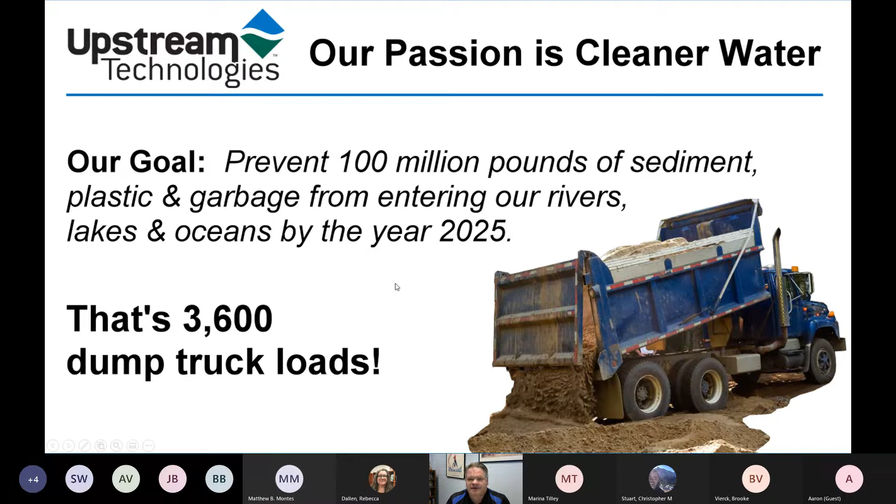We put together a goal at the beginning of 2020, right before COVID hit. We said we want to save or prevent 100 million pounds of sediment, plastic, and garbage from going into rivers, lakes, and oceans by 2025. So we set a pretty big goal. Right now we're closing in on 20 million pounds, and we have a ways to go with just 3 years to do it. So we're focused on that, and when we get up in the morning, that's what we're all about.

We're starting to see different test points around Oklahoma, but we're new to Oklahoma. So the other reason I wanted to present to you guys today is to find out your thoughts, and if there are any groups we should be talking to, any associations or hoops we need to jump through. I would love to get feedback on that.

If there are any BMP lists we need to be on or anything like that—one of the things we found is our company started in 2012. We were primarily Minnesota, and as we've expanded into different states, we noticed every state is a little different, with different groups and different rules and regulations. Any help with that would be greatly appreciated, and if there's a specific group we need approval from, we'd love that assistance as well.

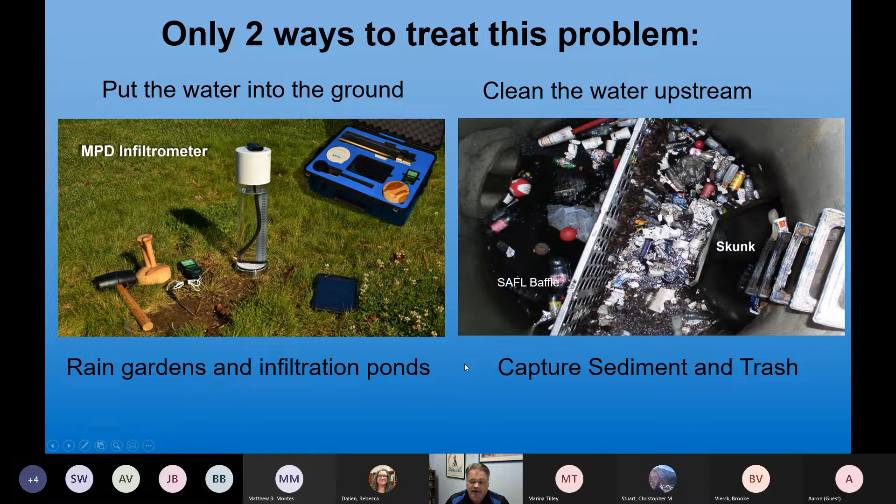I'll start out with the MPD Infiltrometer. If we're looking at infiltrating back into the ground and creating a rain garden or retention pond, we need to know how to size these appropriately. We need to know how well they infiltrate once the ground is saturated.

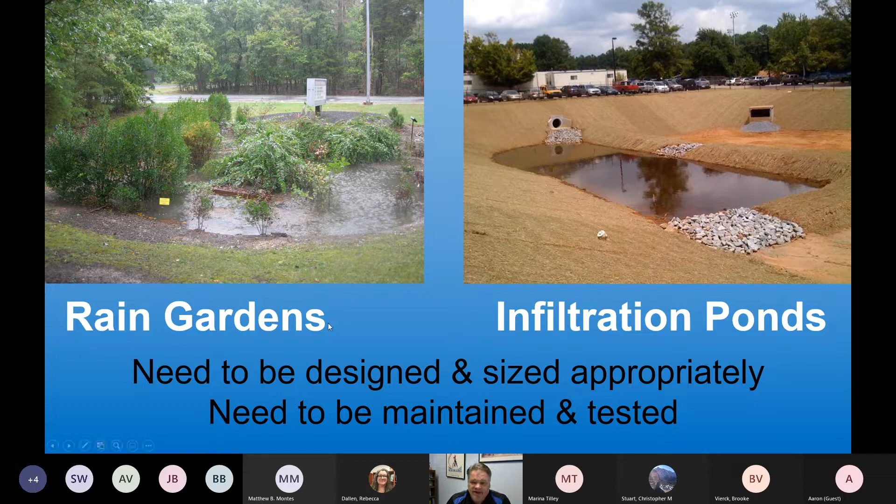There are products out there that just measure the infiltration rate. There's a product called the Turf Tech—they use this in golf courses a lot. This is just to find out what is the soil at this point in time. Is it dry? Is it wet? Do we need to irrigate or not? But that's not a fully saturated infiltration rate or KSAT.

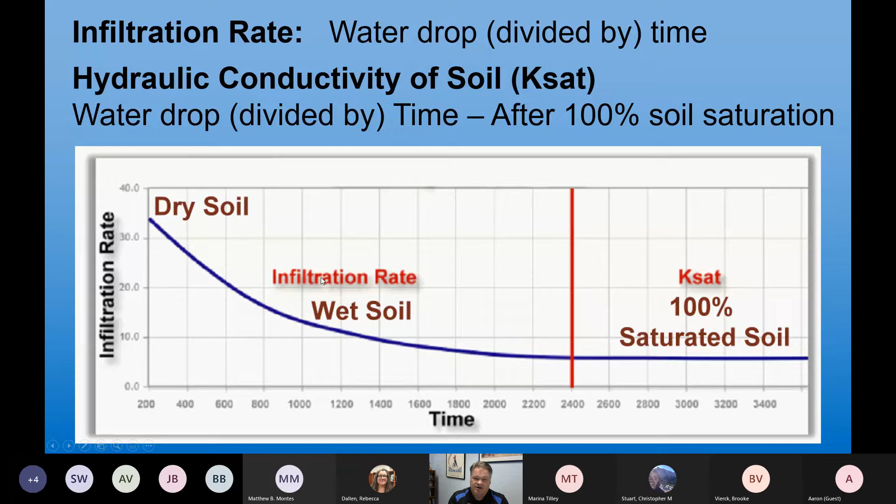We need to get, as in the chart, down to a point where it's fully saturated.

Really, the way this has been done is like a perc test, where you drill a hole and keep filling it with water until it's fully saturated, then measure the drop of that infiltration. Probably the most common that we see is the double ring infiltrometer test.

Normally I would just ask, is this something that you guys utilize? Do you guys hire these out? Is there geotech companies that do this? But this is the one that we're seeing the most.

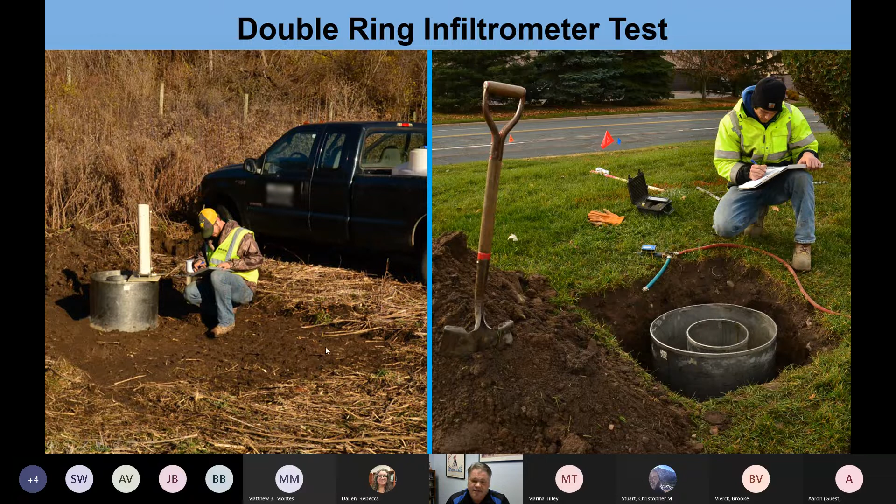The way that it works is it infiltrates the soil on the outer ring and saturates it. It usually takes a lot of water, these tests usually take hundreds of gallons. They saturate the outside ring, then keep that center ring at a constant head, and they keep pumping water into that.

This is a very time-consuming test. It usually takes 4 to 8 hours to do, and it's only giving you one point on that whole site. So it's very time-consuming, very costly, and very cumbersome.

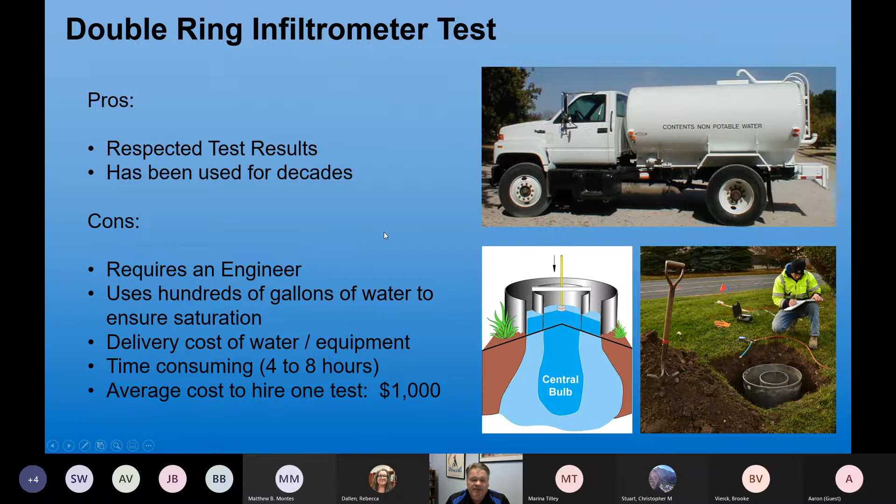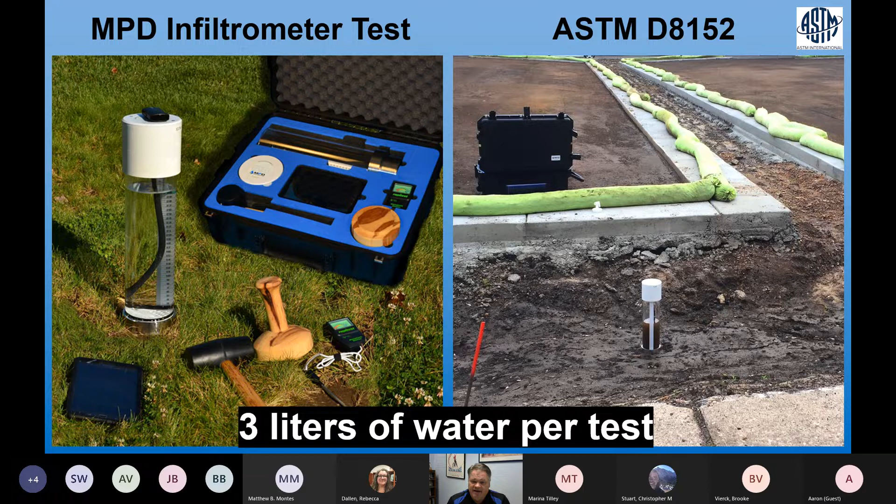What the MPD is, is a smaller portable kit that only takes 3 liters of water per test, so less than a gallon per test. You can go out with a 5-gallon jug and perform these tests throughout the site.

It started back in 1993 with two guys named Philip and Dunn, and they developed a method to calculate KSAT, or hydraulic conductivity of soil, whether the ground was fully saturated or not. They created a way to predict what the KSAT would be, whether the ground was dry or wet, and they did it with a falling head test.

That went all the way back to 1911 using the Green-Ampt theory, and it was updated in 2007 right here in Minnesota. The University of Minnesota modified that method to bring it up to the ground surface. So in 2007, they created the modified Philip-Dunn method, and it went through a series of testing, committees, and subcommittees. In 2018, this was established as an ASTM standard for calculating KSAT.

We automated that system that same year. So now we have the MPD Infiltrometer, which again, you can go out with just a 5-gallon jug and perform 5 tests on that site. Each test, rather than 4 to 8 hours, is usually 30 to 60 minutes. So you can get a much better view of the site, a lot easier, and with a lot less water.

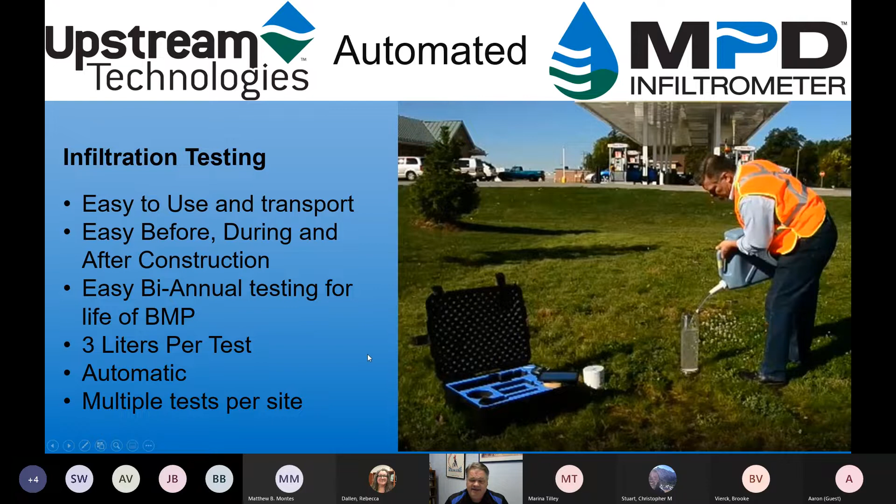And so that's the MPD. I'm going to show a short video here, and let's see if we can get this going.

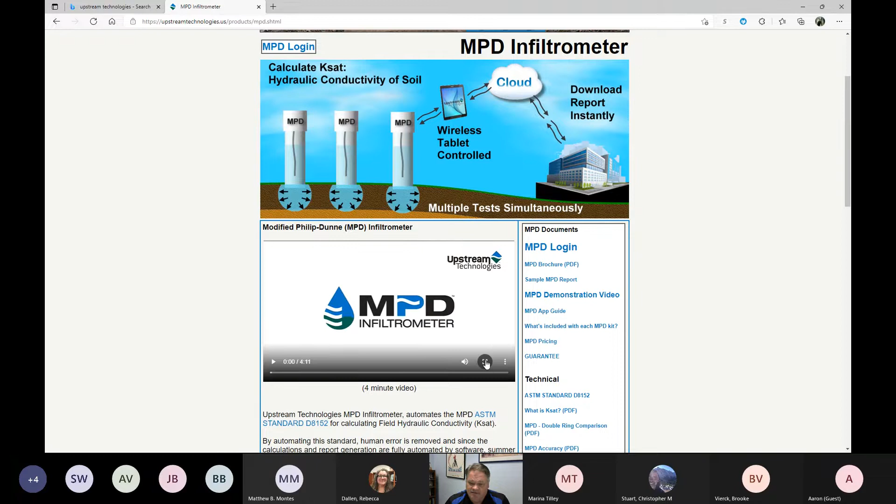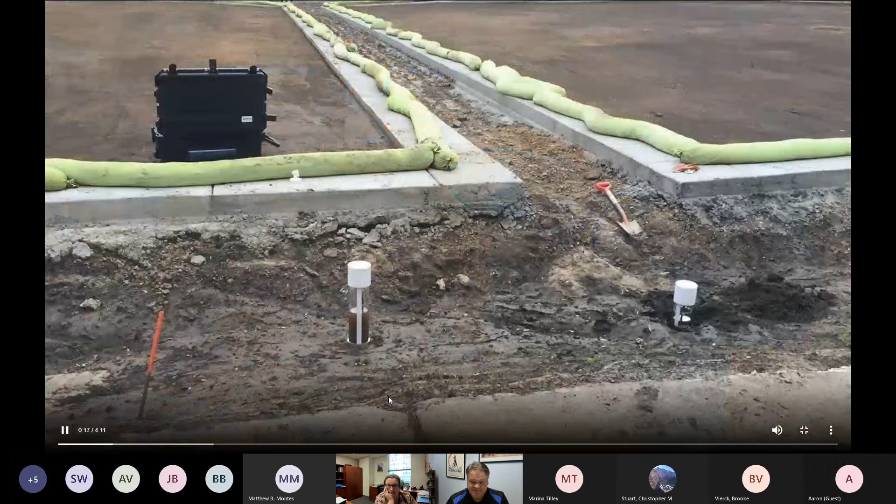Upstream Technologies' automated MPD Infiltrometer follows ASTM standard D8152 and will calculate saturated hydraulic conductivity of soil, or KSAT. It is used to design, build, and test rain gardens, infiltration ponds, bioswales, septic systems, and any location where steady-state infiltration testing is required. Lightweight and compact, the MPD can go anywhere and uses less than 1 gallon of water per test. This kit utilizes a graduated cylinder and an automated test head to collect the data.

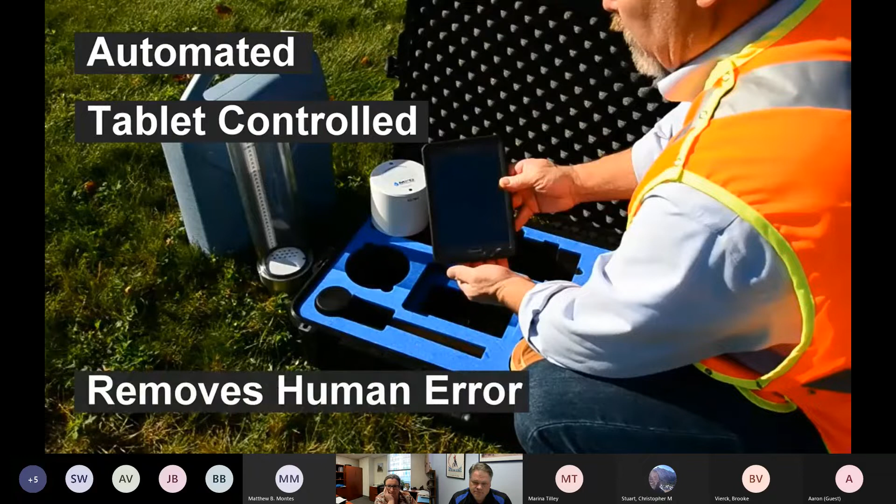The anti-scour baffle and seal prevents the soil surface from being disrupted when filling the cylinder with water. This automated, tablet-controlled system removes any chance for human error. Anyone can operate this instrument with little to no training. Simply consult the in-app guide for step-by-step instructions. This system incorporates a Garmin GPS system to automatically report the exact location the test was conducted.

When performing a test, the first step is to take an initial moisture reading using the supplied meter. Slowly press the probe into the ground 5 centimeters and wait 15 to 20 seconds for the gauge to settle. This gauge is in 10% increments. The result today is 30% moisture.

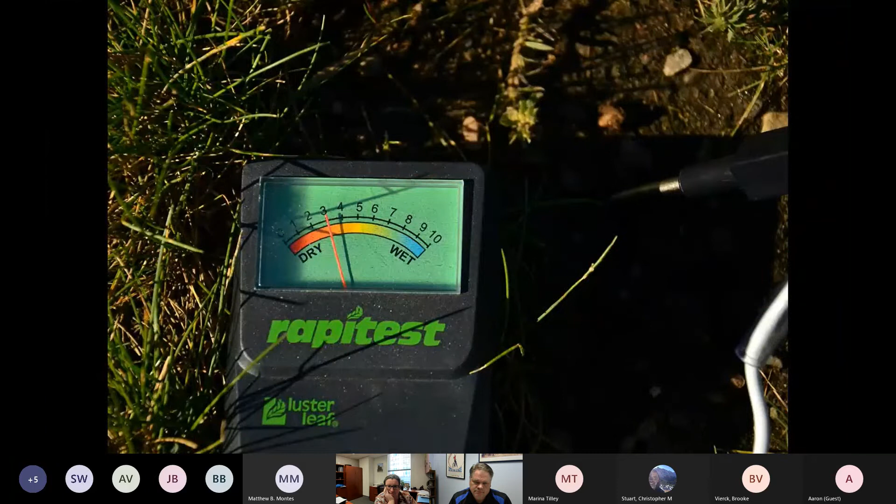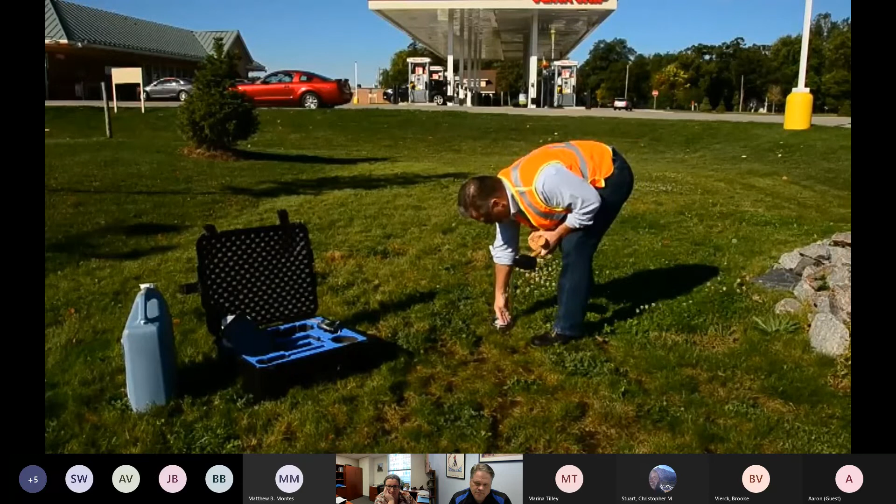Using the wooden set and mallet, tap the cylinder into the ground 5 centimeters. Make sure it is not loose and creates a tight seal with the soil. The anti-scour rubber seal may move during this process. Reach down and reset this seal.

Press and hold the button on the top of the MPD head to turn it on, and a green bar will appear in the app. Tap this green bar, and a dialog box will appear. Enter the initial moisture reading, in this case 30%, and enter a name to identify this test.

Set the tablet down and fill the cylinder with water. Place the MPD head and hose in and on the cylinder. Pick up the tablet and tap the Submit and Begin Test button. The MPD app will now turn the green bar to orange to indicate the test is running.

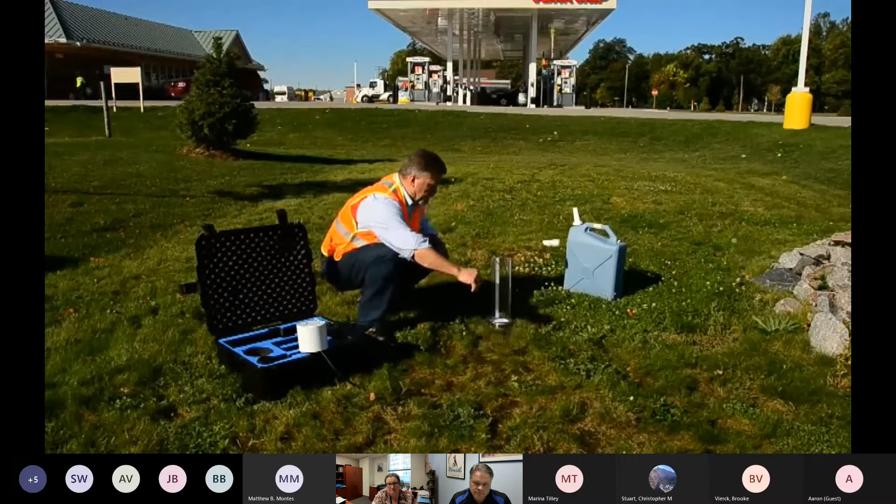The MPD head measures the water head drop over time and automatically records the data required to calculate hydraulic conductivity. It's best to let the cylinder drain completely before finalizing a test. This usually takes about 45 minutes to an hour, depending on soil conditions. When the cylinder has drained, remove the MPD head and cylinder and set them aside.

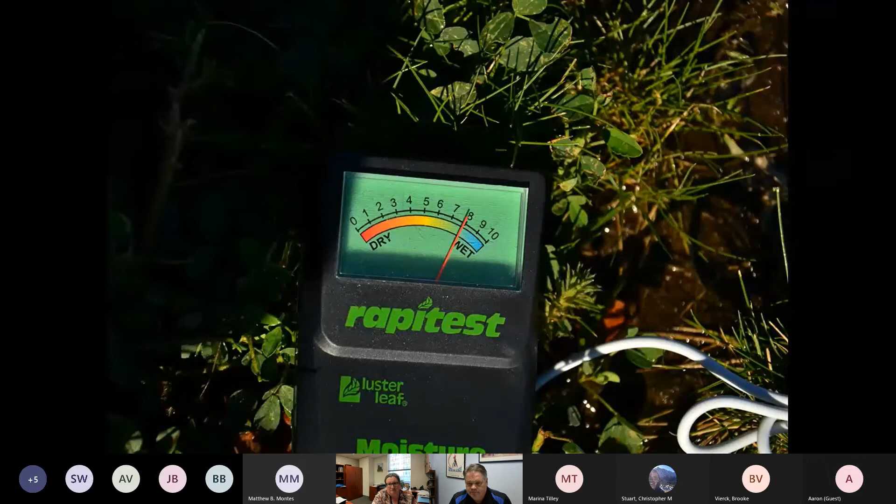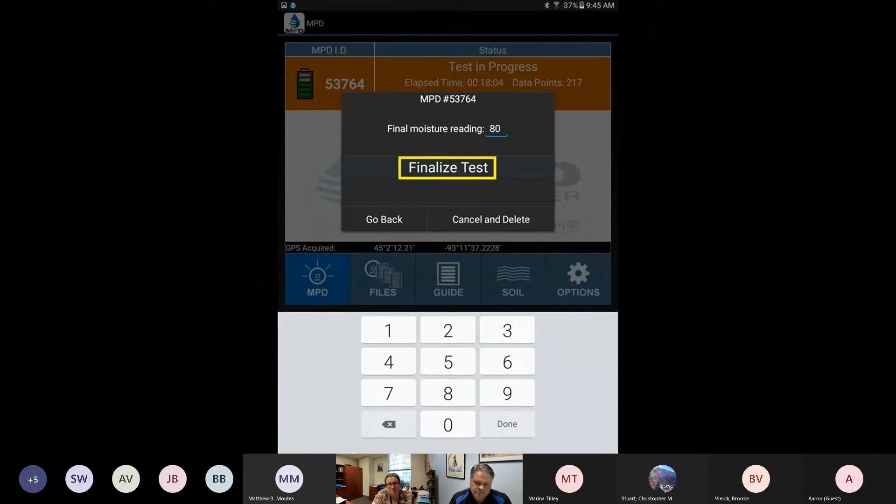Take a final moisture reading in the same location as before. In this case, the moisture reading is 80%. To complete the test, tap the orange bar in the app and enter the final moisture value, then tap Finalize Test. All data then transfers from the MPD head and is stored on the tablet. We're now ready to begin another test.

Ground variations change and infiltration will vary around the site, so best practice is performing multiple tests and creating a site average. Ground variations include soil composition and compaction, boulders under the test, tree roots, and even mole and ant tunnels will have an effect. When testing is completed, the tests are uploaded to Upstream's cloud server, where the calculations take place.

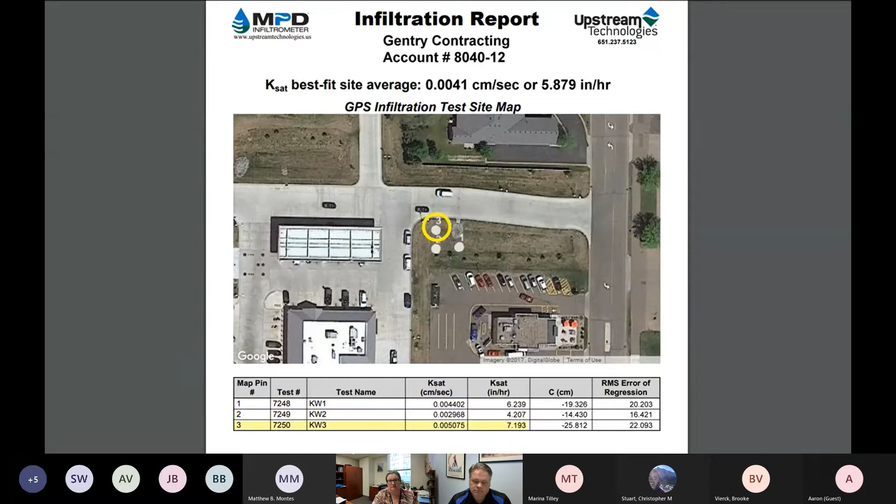A site report may then be instantly downloaded. This report contains a description of the site, a best fit site average, a satellite photo of the site with a GPS map pin for each test performed, and the hydraulic conductivity for each individual test. To maximize time in the field, Upstream Technologies offers a triple MPD kit, so 3 tests may be run simultaneously by one person.

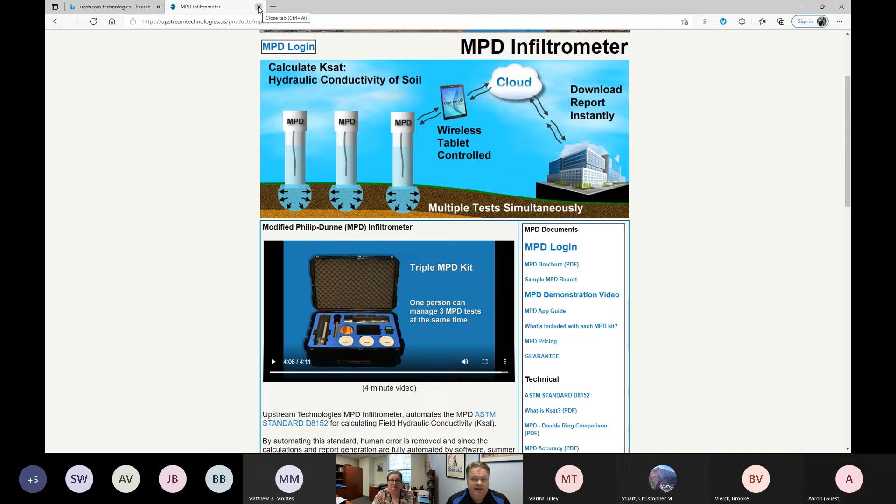So that is the MPD Infiltrometer and the video that's available on our website. I'll get back to the presentation here.

As you can see, it's very easy to use, and again, doesn't take a lot of time, doesn't take a lot of training, doesn't take a lot of water. So quite a bit different scenario than the double ring.

I talked about the years of testing and committees and subcommittees, some of the testing that was performed. This is a tank that we tested internally to show that it can calculate KSAT whether the soil is wet or dry. We started this out completely dry soil, kept doing the test until there was standing water to show that it calculated KSAT either way.

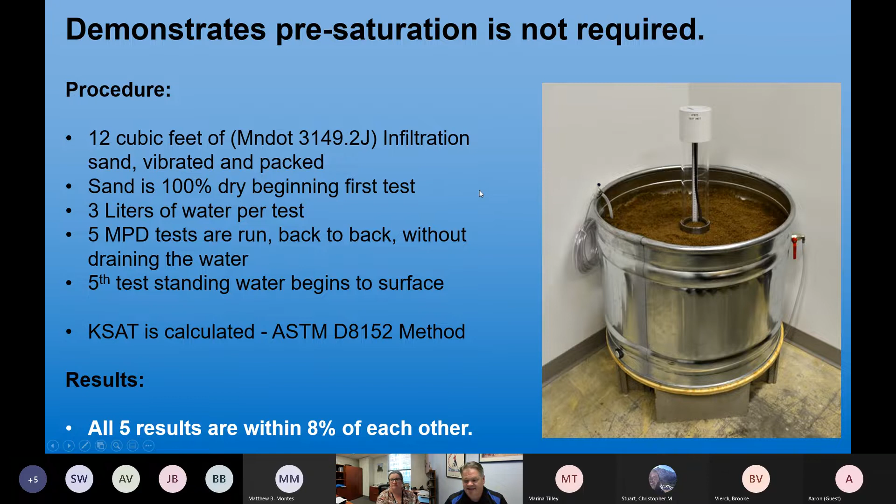We also tested it in a product called the Thermotron. So it's been tested from 33 degrees to 120 degrees Fahrenheit, and also sea level all the way up to 15,000 feet. So it's good throughout the country.

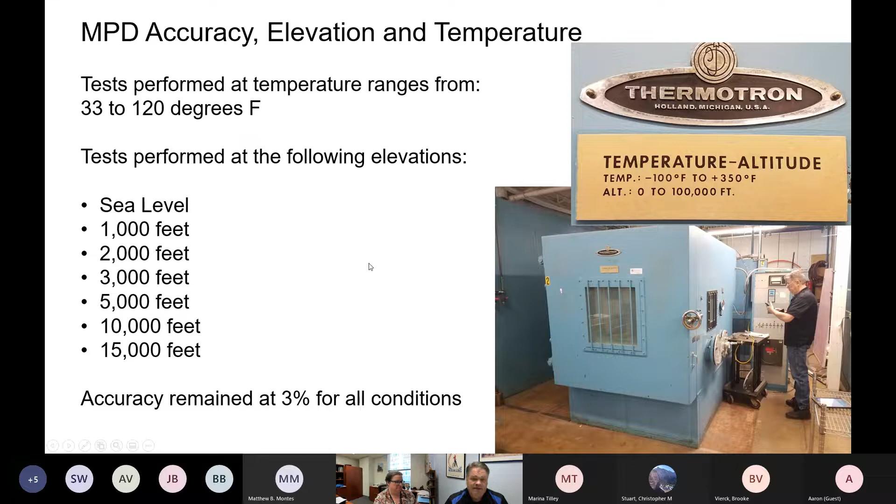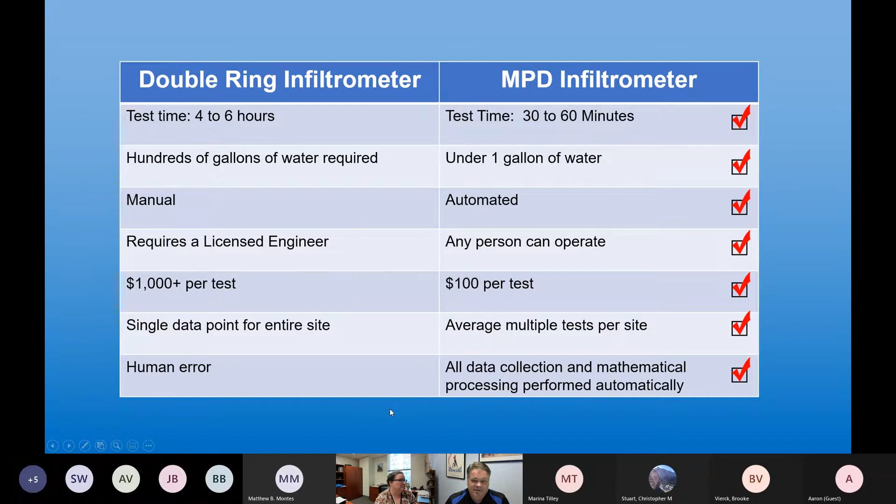And like I mentioned, in 2018, it became an ASTM standard for calculating KSAT. So now it's a lot easier to get this number. What that allows cities to do is be able to manage and maintain these rain gardens much easier.

As it said in the video, you can do up to 3 tests at the same time. Actually, possibly more because there's more room. But our biggest kit is the three test kit, or 3 tubes. It uploads that information to the tablet.

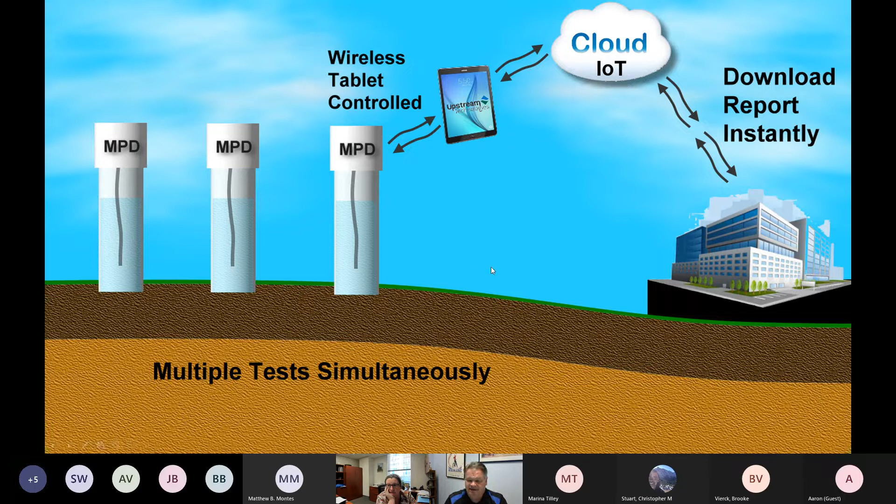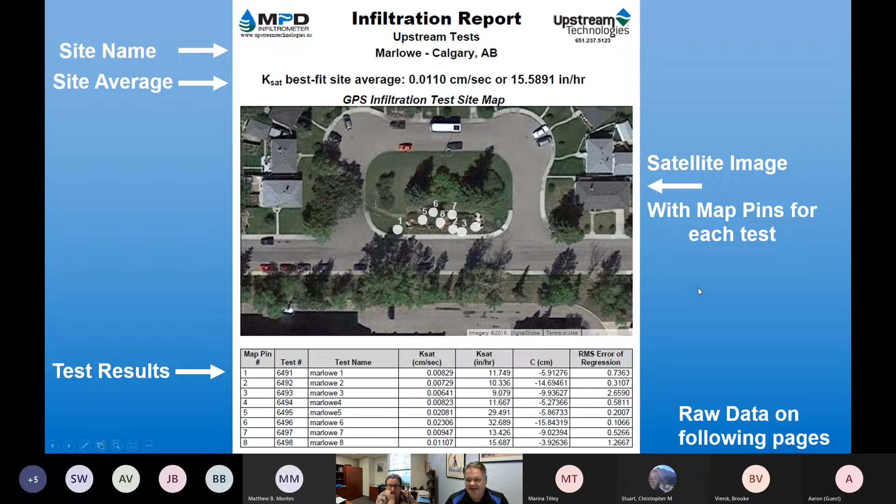Once that tablet's connected to the internet, it'll upload to our server and do all the calculations, and you can immediately download that report. It'll give you a satellite photo of the site with the GPS pins where you did all the testing, the KSAT for each point, an average for the site, and then all the raw data as well. It's being utilized all over the world.

So part of the reason I wanted to reach out is we're trying to get to states that haven't utilized the technology yet, because I think you'll see it fairly soon. We're starting to get utilized quite a bit in the South.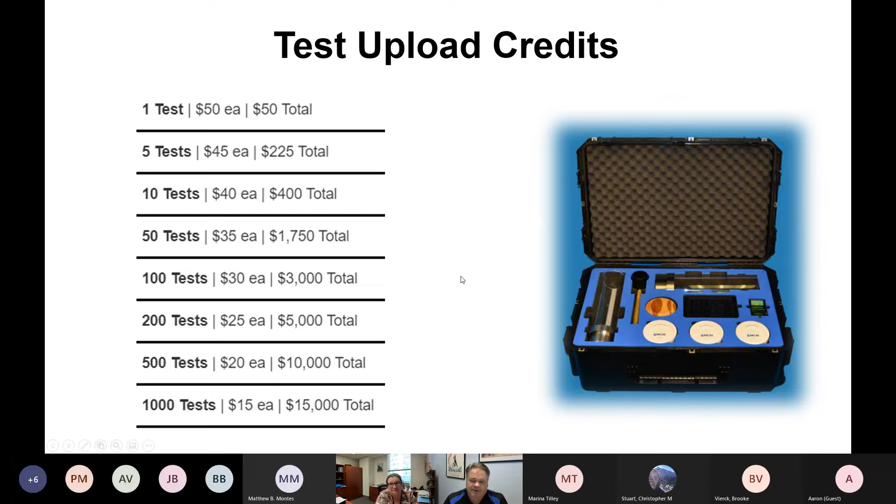If you look at even the top number, 50, if you did $50 and you did 5 test points on a site, that's $250. One of those double rings is about $800 to $1,000 for just that one test point. So quite a bit less expensive.

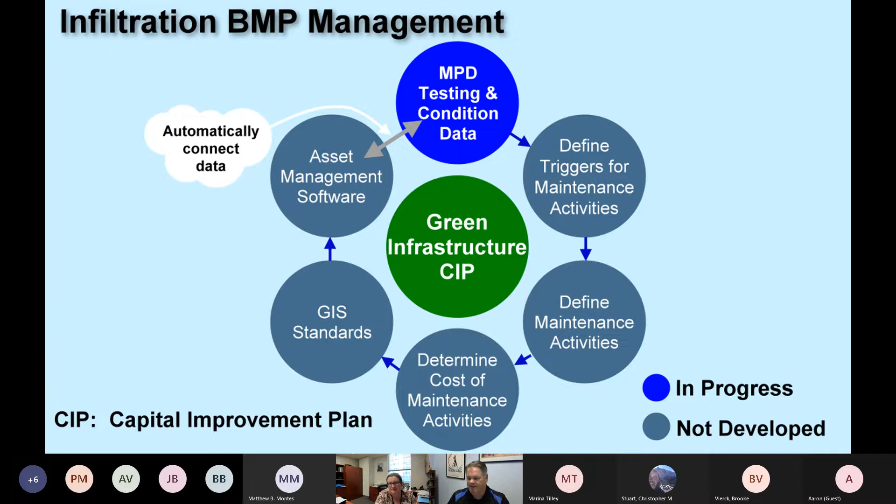The other thing we're starting to see is cities are really using this because now you can do these tests very simply and easily. So they're able to work on their capital improvement plan of rain gardens and retention ponds, figure out what the maintenance triggers are, and tie it into their GIS software or asset management software, because it's all digital now.

So that is the MPD Infiltrometer. Wanted you guys to be aware of it. I don't know if anyone has any initial questions or thoughts. Is this anything that you guys use or do double rings at all, anything like that?

This is Rebecca. I haven't personally been involved in any infiltration testing, but that certainly sounds like your system is a lot easier. Has anyone else had any opportunity to do any of those types of tests?

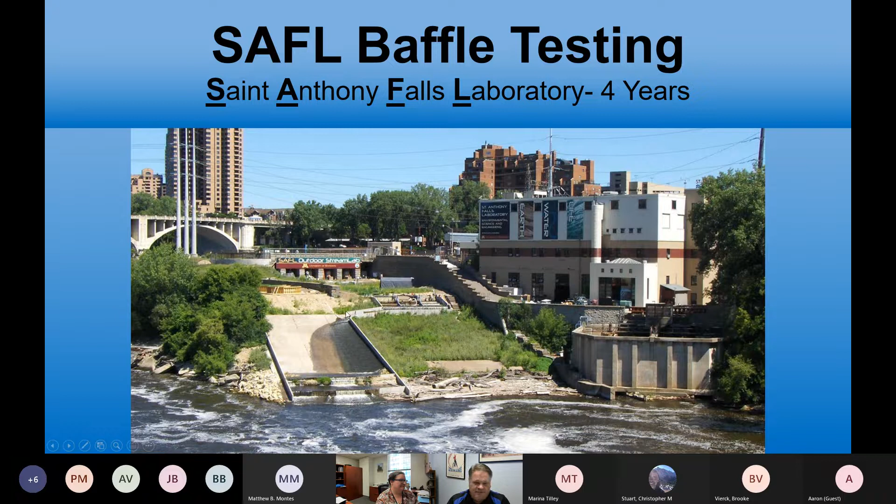They have a river that runs through the lab, and on the outside you can see they test all sorts of ground cover, water flow, different erosion methods, and all sorts of stuff. Inside the lab, they run this river from the top to the bottom through all 3 or 4 levels, and they can do all sorts of testing in there. So it's set up for hydraulics and water flow.

People come from all over the country to do testing here because it's such a unique situation, and it really gives them the ability to test how that water is going to work, how it's going to flow through the river. Pretty neat situation. Again, that's been at the university since the 1930s.

So where did the SAFL Baffle come from? Back in 2007, our Department of Transportation was having a big issue. They had installed all these standard sump structures throughout the state, and what was happening is they were capturing the sediment, but if a big storm came through, it would resuspend all that sediment and send a lot of it downstream. So these sump structures were getting washed out, and they came to the University of Minnesota, St. Anthony Falls Laboratory, and said, 'Can you come up with a solution for this?'

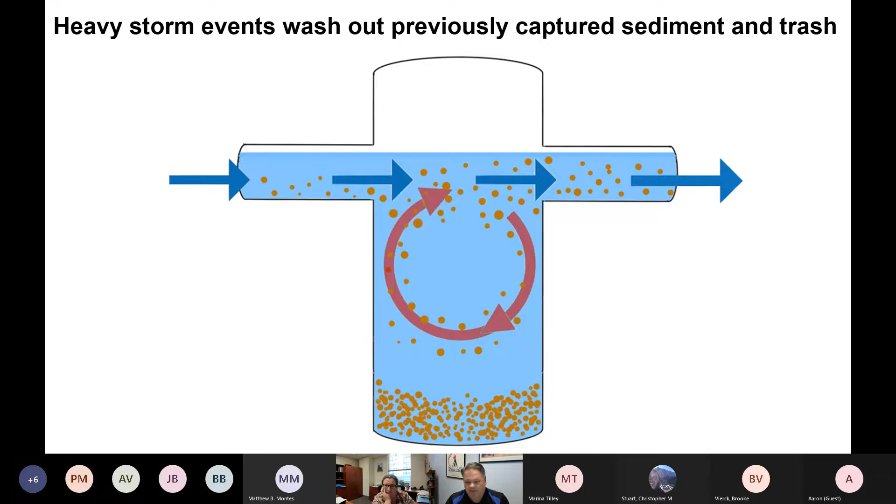It's really a unique product because the DOT had a problem, and this product was created to solve that problem. It took them 4 years, and they figured out that by putting in this baffle with a certain percentage of open space, it created flow through the standard sump structure. Now you could take a standard sump structure, and rather than a 30 to 35% capture rate, they were able to achieve 80+% TSS removal.

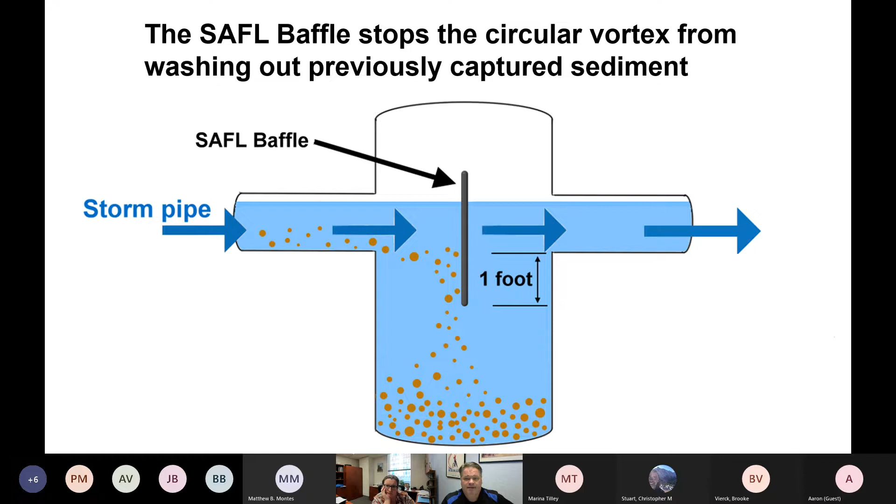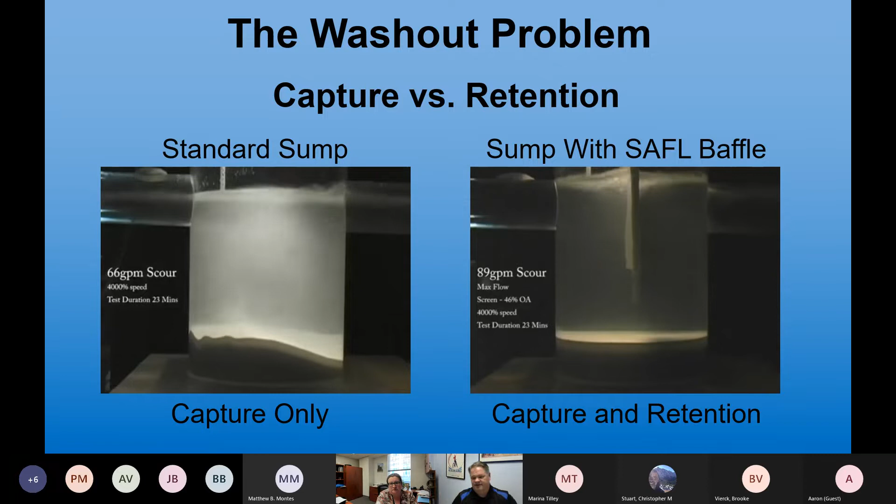I'll show you a video here. This is showing on the left without the SAFL Baffle, and then the same amount of sediment on the right, with actually a little bit faster flow even. You can see that rather than churning that sediment and washing it downstream, it creates a flow and stops that from happening. So now you can take a standard sump and achieve very high levels of sediment capture.

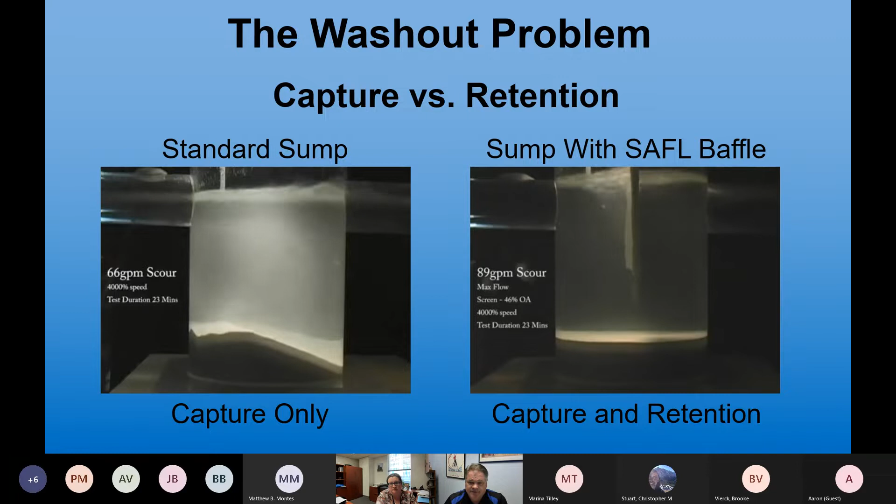We're starting to surround Oklahoma, so I want to talk to you guys and find out what we need to do to have this be another alternative for you, because it fits a certain niche, certainly for retrofit options, but also if there's money constraints, this is a much less expensive option.

So that's where we're at. We're focused on the sediment side, not so much the turbidity. And so we fall right into place with the hydrodynamic separators.

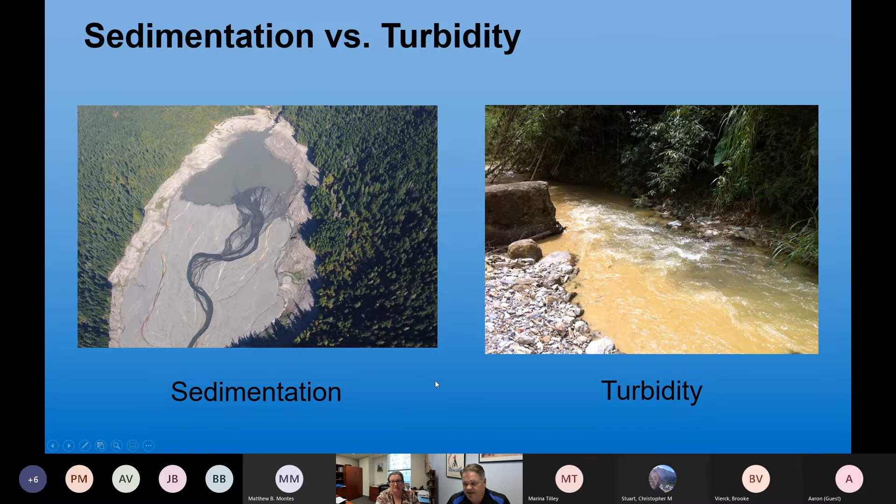I saw that you guys are having, the next meeting talking about hydrodynamic separators. These are great products. They've been around for a long time, and they do a great job. It's a little bit different because they come complete as a full unit, so they need to be primarily new construction, or the streets would need to be torn up. So we could just be another alternative depending on your situation.

Price-wise, most hydrodynamic separators are 20, 30, $40,000. Our average SAFL Baffle is about $4,500, so quite a bit less expensive. We also have the advantage because of the way the SAFL Baffle is created, it handles real high flow rates, so there's not a need for a bypass system, and that saves some money as well.

When you look at both of these products, they kind of handle 70 microns and above. Anything more fine than that is more on the turbidity side, the real fine particles. That usually requires a media filter membrane system, something like that. Those are very expensive, usually $100,000 or more.

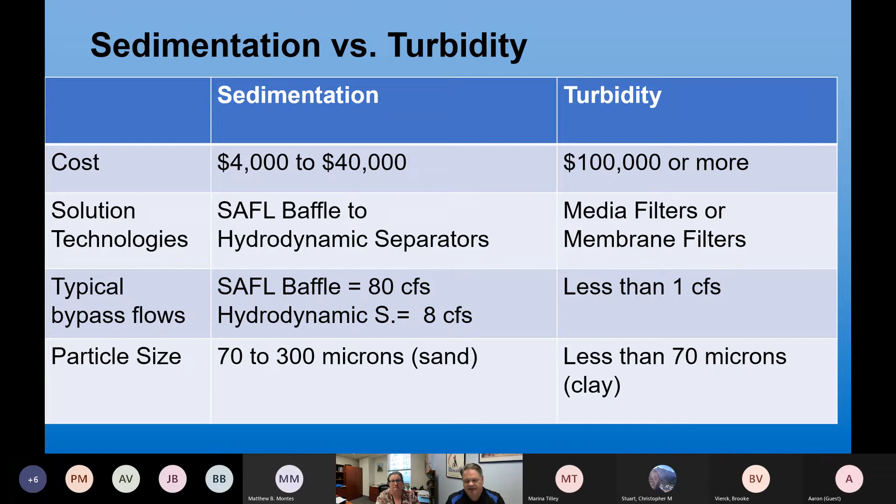One of the things we've started to see, because those systems are so expensive, is they'll take a standard sump structure and put a SAFL Baffle ahead of that expensive system as pre-treatment. We've seen that quite a bit, stopping the majority of the sediment upstream with the SAFL Baffle and being able to vacuum that out, saving the life of that filter system and preventing extensive maintenance and replacement costs.

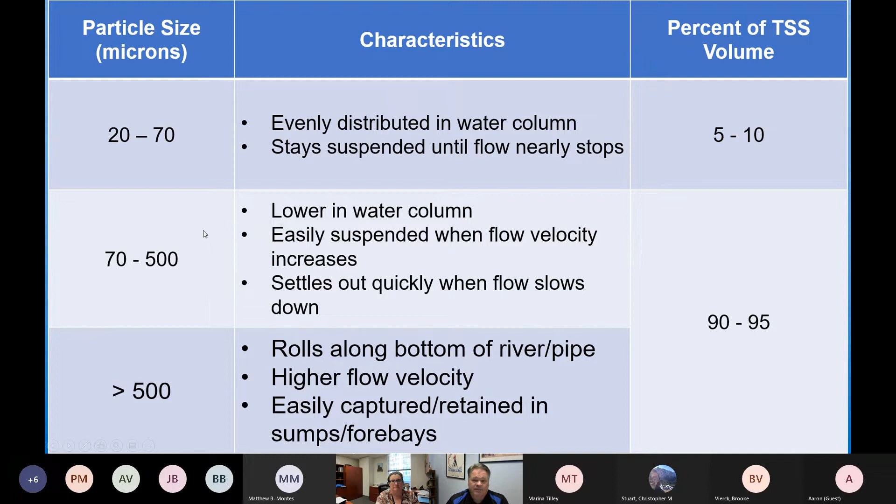About 90 to 95% of the sediment is 70 microns and above, so the SAFL Baffle can handle the majority of it. Anything smaller than that would require more of a filter-type system.

We're really trying to help with the sediment issue. The Army Corps of Engineers said they spend about $1 billion a year in dredging, so lots of money going into dredging costs, because if you're not stopping the sediment, it's ending up in streams or lakes, and then that needs to eventually be dredged out, which is pretty expensive.

The other thing we're seeing: there was a study done in Florida that said about 50% of the phosphorus is in the water, but the other 50% is clinging to the sediment. So if we can get that out of there, we're helping with the phosphorus issues as well.

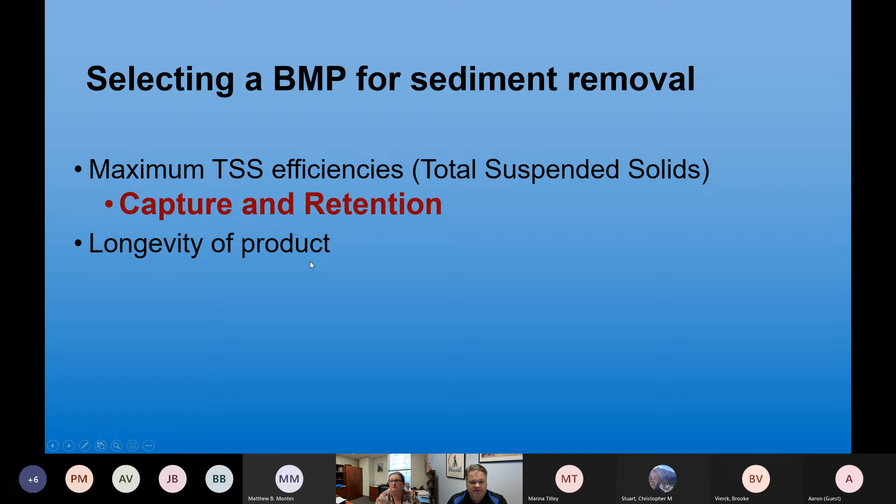When you're looking at different BMPs, the total suspended solids or TSS is a big thing. Throughout the country, 80% is a pretty common number, but standard sumps were capturing it, just not retaining it. By adding the SAFL Baffle to a standard sump structure, we're able to hit those 80+% TSS removal numbers. The SAFL Baffle is built on 100% stainless steel, so it's built for longevity, with no maintenance or moving parts. Once it's installed, it's good to go.

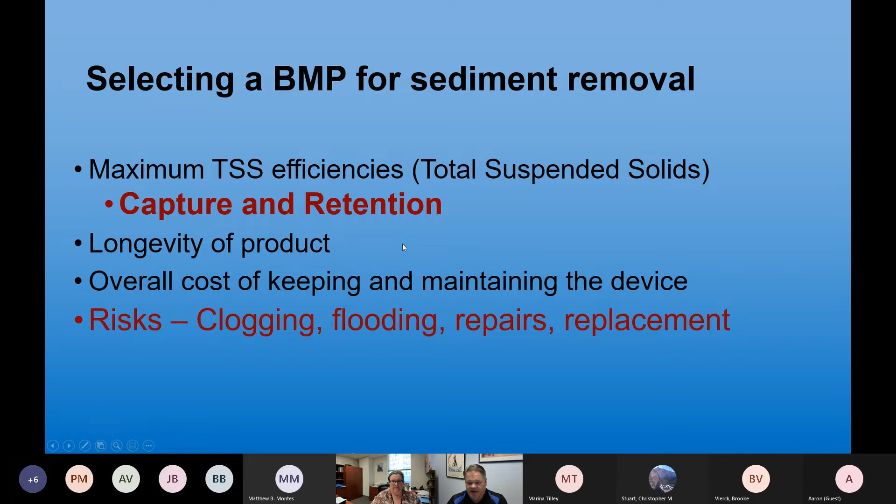The one thing the DOT was concerned about was, now that we figured out how to solve this sediment problem, we're putting something in the middle of this structure. What if it clogs? Are we going to be backing up systems everywhere? So there was lots of testing performed to make sure it wasn't clogging or backing up systems.

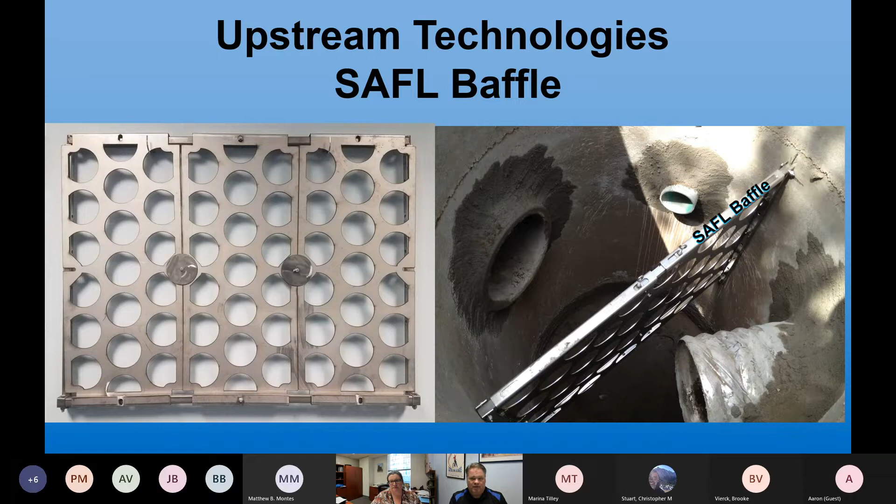If you haven't seen a SAFL Baffle, this is what they look like. Again, they come in panels so that all the pieces and parts can fit through a manhole, so it can be used for new construction or a retrofit situation.

The testing they went through, I mentioned it was about 4 years of testing. They did a lot of empirical testing, case studies, real life performance results. They also worked with Barr Engineering and created a third-party software called SHSAM.

This is not the music software. This is for sizing hydrodynamic separators and manholes. It's a third-party software that's available through our website, and also through Barr Engineering. It gives the ability to test different BMPs head-to-head.

So for your project, one of the things we're offering, since we're new to Oklahoma, is if you have a project that requires sediment capture, we have an engineer on staff. They'll take your project, perform the SHSAM software analysis, put a full report together, and let you know the removal efficiencies, the sizing, the costs, all that kind of stuff, so you can compare it to the other options out there.

Back in 2007, the only test method out there was the New Jersey test method. They would take a cup of sediment before the BMP and a cup after. But the university, working with Barr Engineering, needed something way more specific than that, so they created a new test method called the mass balance method, which has actually become an ASTM standard for testing as well.

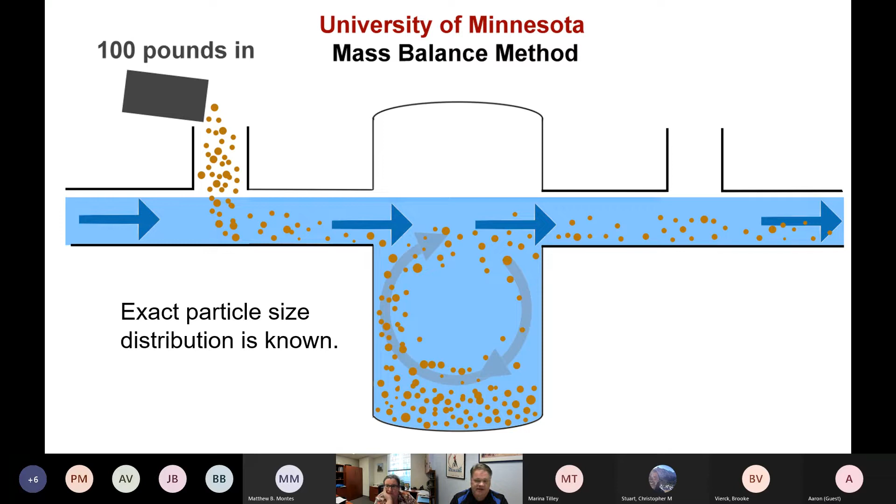They took 100 pounds of sediment with a known exact particle size breakdown and ran it through each of the different BMPs. They tested about 9 different BMPs: a standard sump structure, a standard sump structure with a SAFL Baffle, and a bunch of hydrodynamic separators like the downstream defender, Stormceptor, and CDS unit. So lots of testing was done.

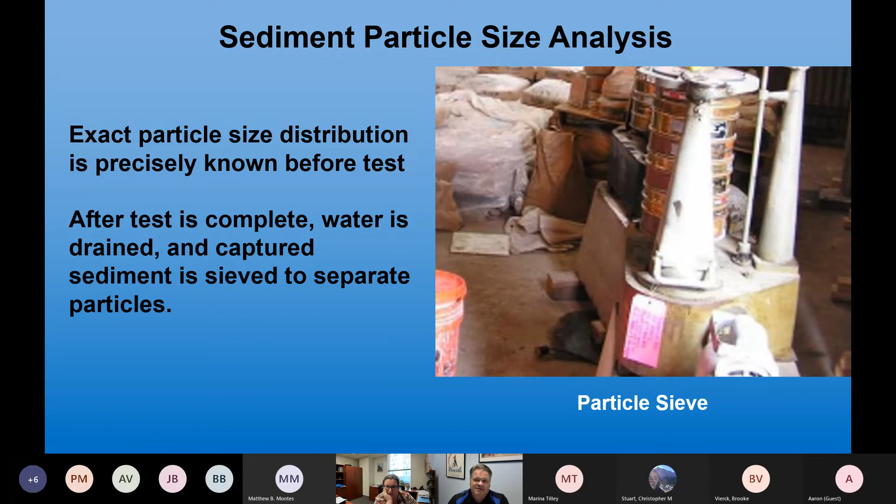They would run it through all the different BMPs, then drain the water, take the sediment that was captured, and put it through a sieve or sifting system. They'd figure out exactly the percentages of each particle size captured by each of the different BMPs, so now you can compare these different BMPs head to head specific to your project.

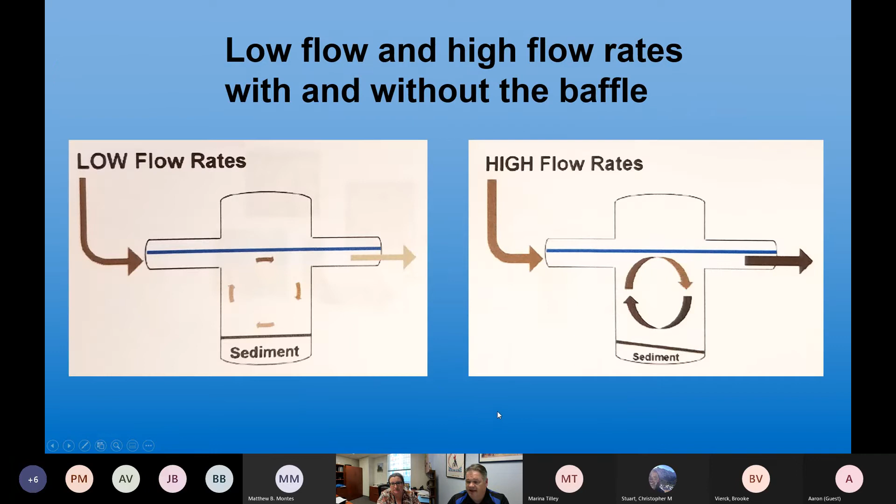The testing they did with the SAFL Baffle covered capture and washout, clogging, low flow rates, high flow rates, and different sump sizes from half a foot all the way up to 6 foot sumps. They also tested different angles, since as you know, they're not all 180 degrees apart coming into the sump structures. So they tested how to place that SAFL Baffle, which is another thing we can help with—we have a guy who does CAD drawings. So if you do put a SAFL Baffle on your project, we can help with the placement as well.

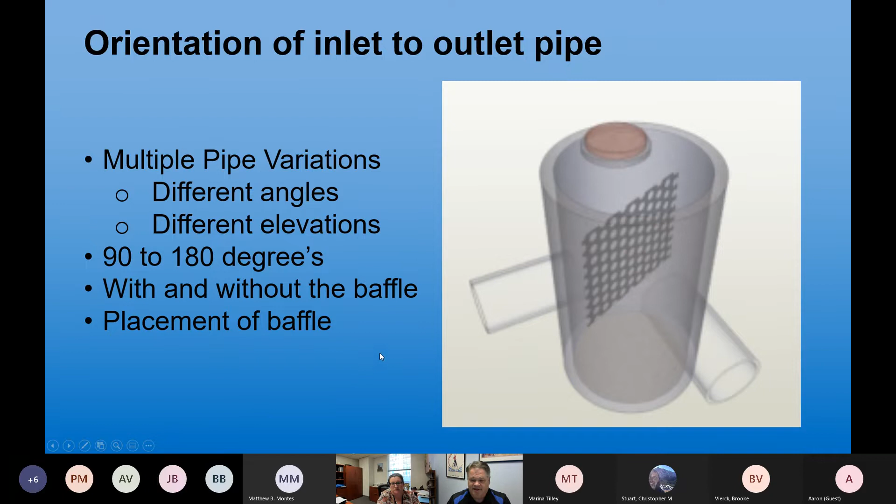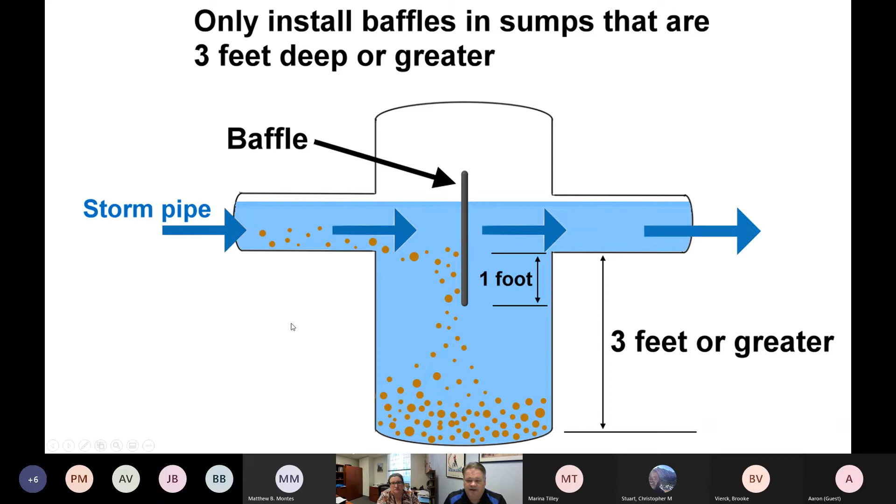When they looked at the depth of the sump, one thing they found was that anything under 3 feet, even with a SAFL Baffle, would get washout. So we have a minimum of 3 foot sumps for the SAFL Baffle, and that same minimum applies to the Snout, which I'll talk about in a little bit, for the garbage. So, 3 foot minimum.

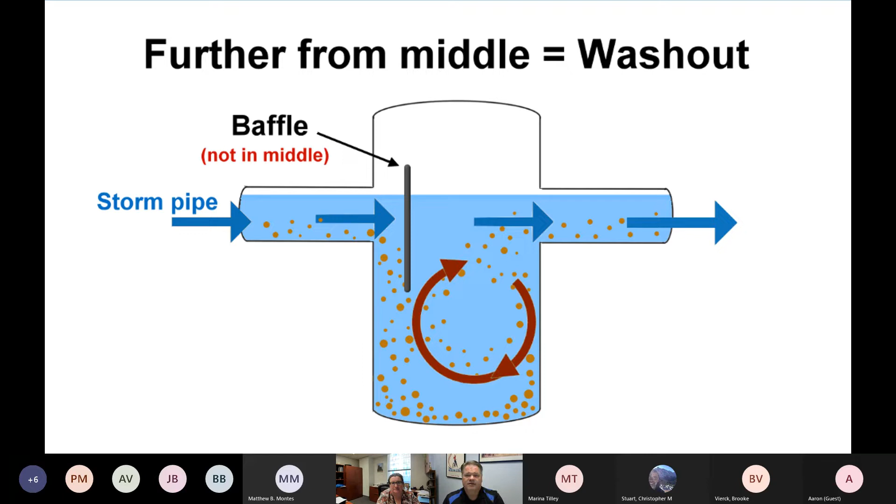They also looked at the placement of the SAFL Baffle and noticed if they got too close to the inlet pipe, not only was there a clogging issue, but they also started to get some washout. So the SAFL Baffle is put more towards the middle of the structure, not only for optimal flow but also for clogging issues.

It works well with multiple inlet pipes. So when you think about different projects or different ways that the SAFL Baffle could be utilized, it can be used in multiple inlet pipe situations as well.

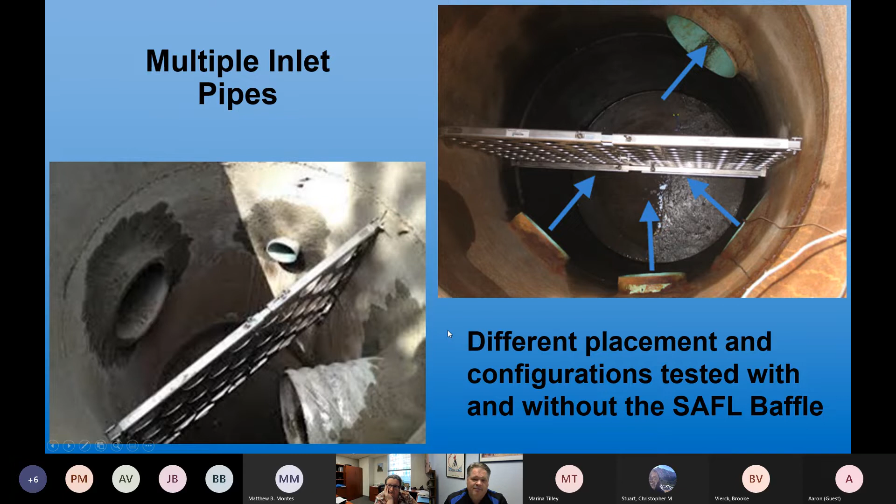One area where it didn't work very well is if all the water was coming from the top. We need that horizontal flow through the sump structure at least 75%. Some water can be coming from the top, but we need the majority of the flow to be horizontal. If it's a catch basin at the end of a parking lot and it's all coming from the top, we'd want to put this downstream so we could have that horizontal flow.

Hello? Was there a question? No, I think someone just accidentally unmuted themselves. Oh, okay.

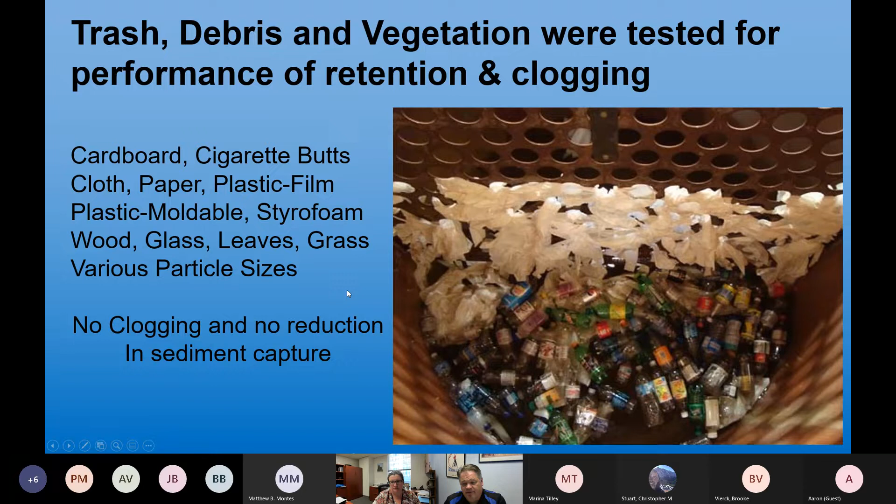I'll keep going here. I talked about the garbage, so they did a lot of testing. In fact, they purposely clogged the SAFL Baffle to make sure that even if it did clog, which it's designed to not clog, but if something unique happened, it won't back up the systems. We have over 1,800 of these, closing in on 1,900 across the country, and we've never had one cause a backup.

This particular sump structure is in St. Paul. We're in Minneapolis, the Twin Cities; the other side is St. Paul. This has a lot of garbage coming through it, and as you can see, the SAFL Baffle does a good job of stopping all that, and even this one's not backing up.

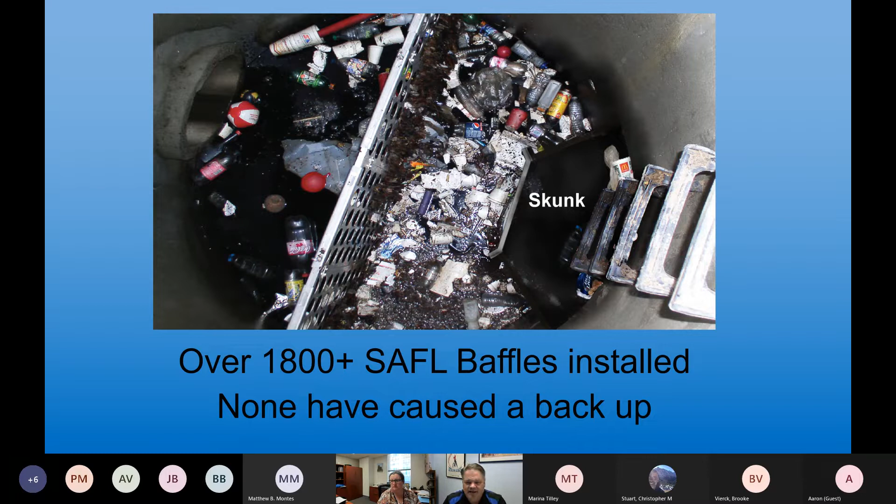Typically these are cleaned out about every 6 months, so what we're seeing is kind of a twice a year clean out. This one has so much garbage they maybe clean it out a little more frequently than that, but typically about every 6 months or so.

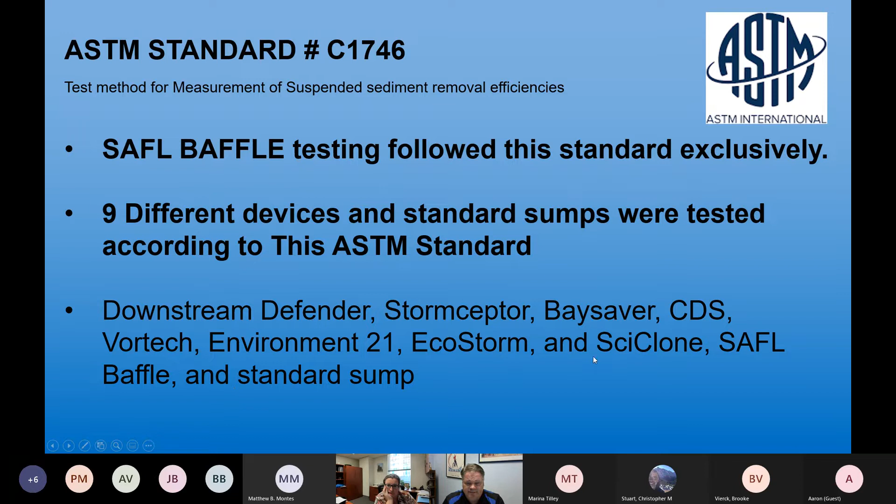The SHSAM software, or the testing, these are the 9 different devices that they tested: Downstream Defender, the Stormceptor, Baysaver, the SAFL Baffle, and the standard sump. Now what you can do is use this SHSAM software, look at the acreage of your specific project, the slopes and pipe diameters, and really compare these BMPs head to head.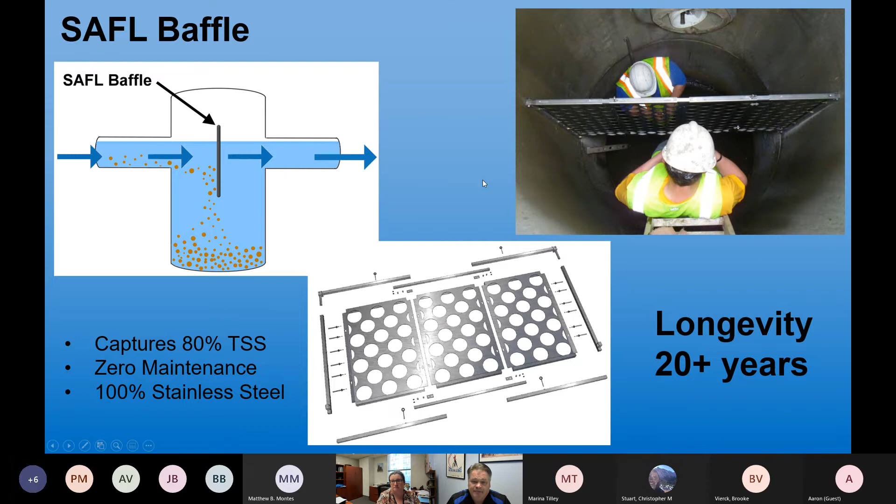The top piece is put on, and then depending on how wide the structure is, those panels are hung on that top piece, and then the bottom piece locks it all in. Once it's in, you don't need to do anything. There's no maintenance to it at all. It has a 20-year guarantee.

So when you guys look at different BMPs, the SAFL Baffle is guaranteed for 20 years. If anything happens to it, if it bends or breaks for some reason, we'll replace it and fix it at no cost.

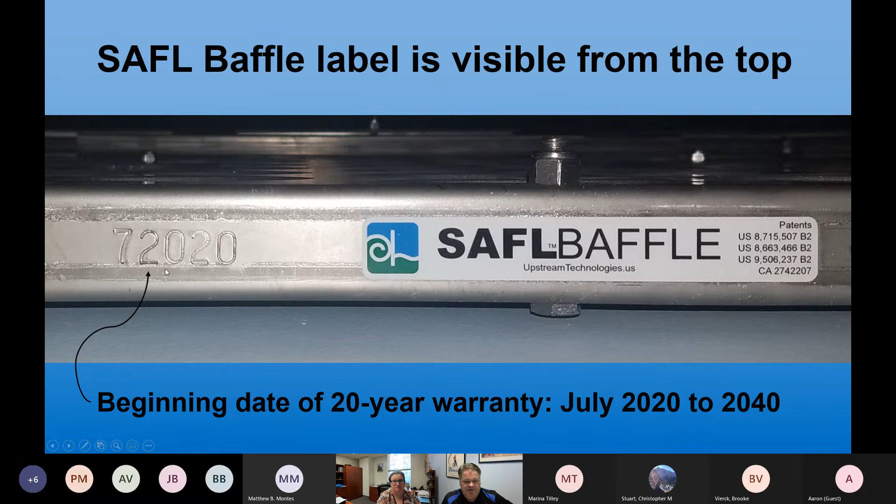Each SAFL Baffle is date stamped, so it's under full warranty for 20 years from that date. Just so you guys are aware of that.

Our DOT put a lot of these in. They actually called out the SAFL Baffle back in 2017, and said it's working so well that it's going to save the state about $26 million over the next 10 years. We were excited to see that they called it out, but it does a good job of stopping that sediment, eliminating the need to dredge as often, and really does a good job of stopping the garbage too.

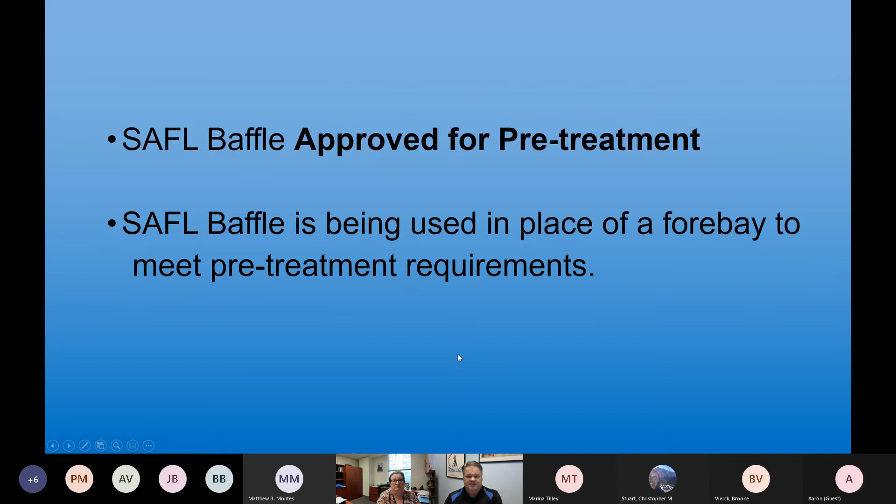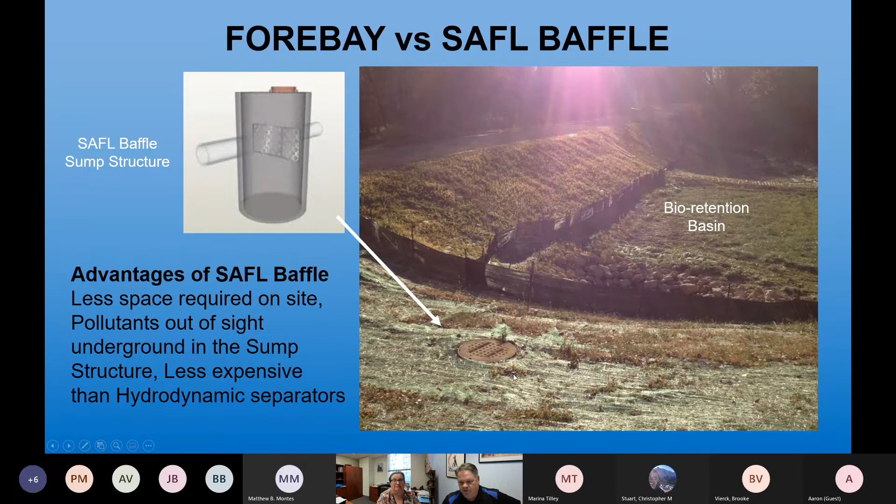We're also being approved across the country for pre-treatment. I mentioned pre-treatment in front of a filter system, but we're also being utilized in place of forebays. A lot of times these developments don't have a lot of room for the forebay, or maybe they don't want a forebay that they'll have to dredge, or floating garbage or something like that. We're seeing a lot of retention ponds with a sump structure and a SAFL Baffle in front of them as pre-treatment. If they have garbage, they're putting a SNOUT in there as well. So pre-treatment before retention ponds.

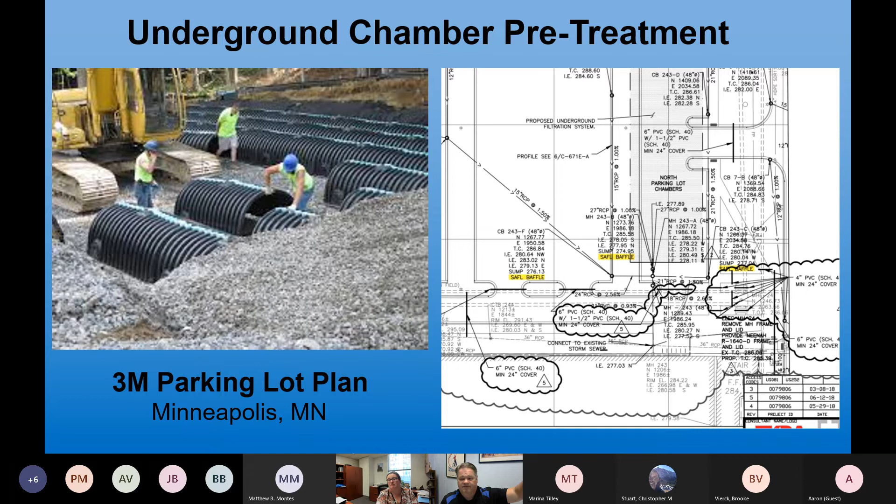We're also seeing a lot of these underground chambers. This is a 3M parking lot here in Minneapolis. They had a big underground chamber, but they put 3 sump structures ahead of it with 3 Saffle Baffles, and they were able to create a situation where they could stop the sediment before it goes underground. So we're seeing a lot of that pre-treatment.

I mentioned it being a retrofit option. A couple examples we've run into are situations where if you ever run into a problem or you're looking for a retrofit solution.

We had one in Utah. It was a downstream defender, which again, these products work great. These were just specific situations where they ran into an issue. That top one, the downstream defender in Utah, had rocks coming through the storm drain, and in about 3 weeks it chewed up that yellow plastic that's inside there. They had already put the street in and everything was covered, so they didn't want to tear up the street. So they said, can we take this out and retrofit a SAFL Baffle across that 10-foot structure? We put a SAFL Baffle in place of that yellow plastic, and we had to double stack it. It was a pretty big one, 10 feet across. I talked to him about a year and a half after the installation, and it's been working great, not only for the heavy flows but also handling those rocks coming through.

The one on the bottom is the Stormceptor. This was in Colorado, installed near a mountain, and the flow was always over eight cubic feet per second, so everything was going through the bypass all the time and nothing was going through the system. So they did a similar thing, they cut the insides out, and we retrofit a SAFL Baffle across there. It immediately started taking all the garbage and everything through the system and stopping it with the SAFL Baffle. This worked out so well for them that they did 2 more that summer, and the following summer they added 3 standard sump structures with Saffle Baffles because it was handling the high flows so well.

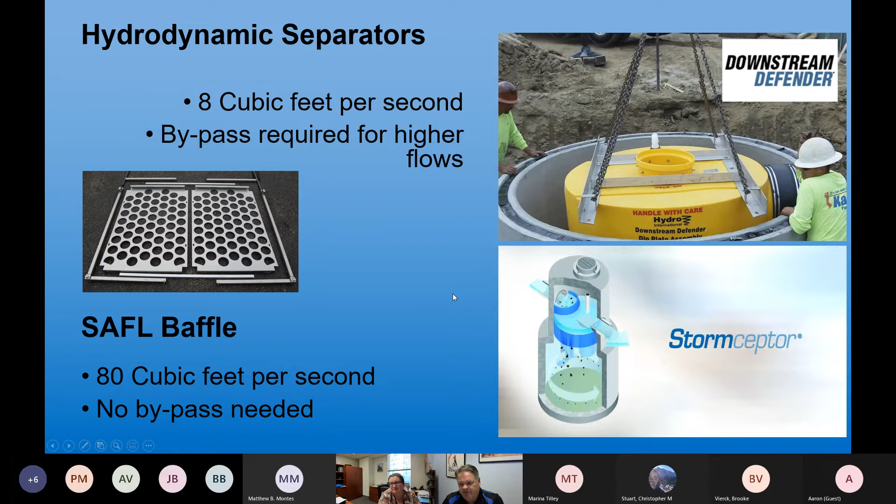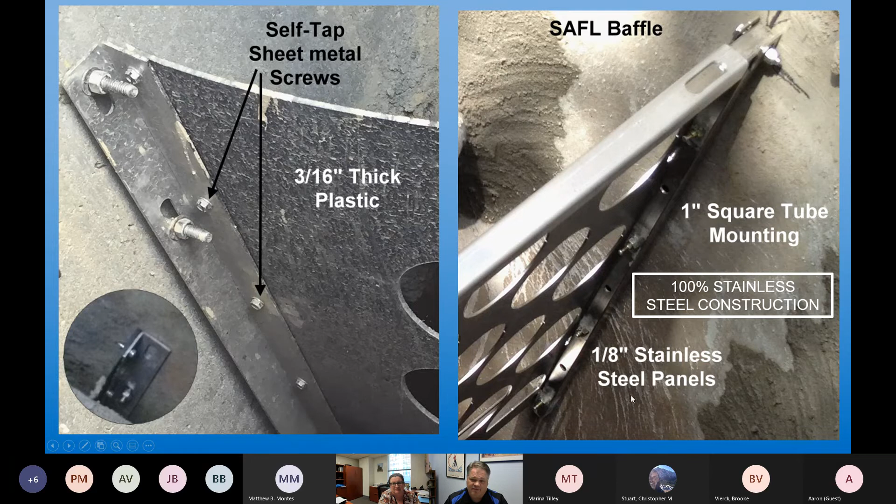We've had a lot of contractors that worked with cities and said, hey, can we put this one in instead of the SAFL Baffle? But it's quite a bit different. This one's plastic, the SAFL Baffle being stainless steel. And if that inlet pipe sticks out at all, they're getting installed right up against it, and so these are causing major flooding and clogging issues. We've had maintenance crews that have had to go in and cut these out with knives. We had one guy that had to use a ramrod to get it out of there.

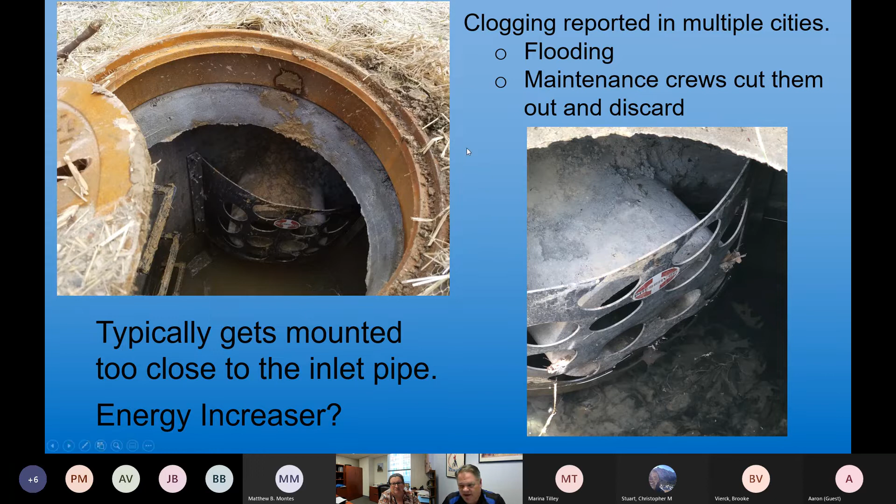And again, that's one of the things that was so great about the development of the SAFL Baffle. They did it at the university, and they took time to make sure that we're not going to have clogging or flooding issues with this product. So that's something just to be aware of.

Also, they have this piece over the outlet pipe, which is open on top, so it's not a garbage guard. It's to stop the sediment that's being resuspended. But the worst one was a big storm came through and pushed that plastic up against the outlet pipe, and it backed up that system like 2.5 feet of water in the street. So something to be aware of.

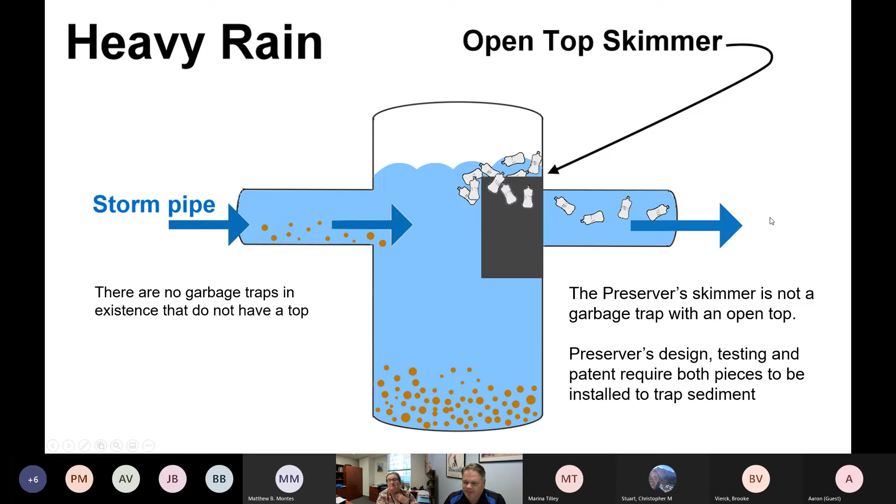The other thing we've seen is contractors that just said, well, I'm just going to cut holes in a piece of metal, because that's what the SAFL Baffle looks like. The unfortunate thing with this is it was only about 25% open space, and so it was actually creating more turbulence than if it wasn't in there.

That 4 years of research and creating this product to solve the problem came up to 48% open space, which is kind of the magic number, I guess. And it creates that flow through there, stops any resuspension from happening. Again, it took 4 years for them to figure that out, but that's the magic number of the SAFL Baffle. So now you can take a standard sump structure, put a SAFL Baffle in there, and achieve those removal rates that you really want to achieve.

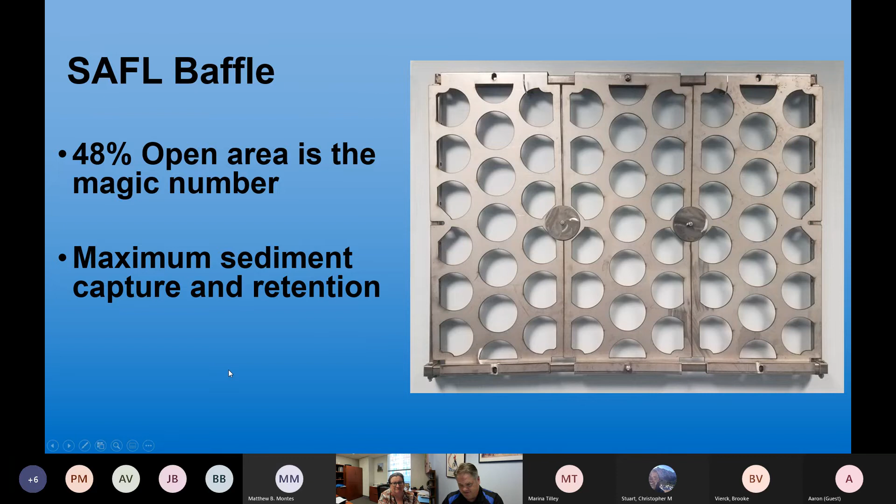80% TSS removal, handles real high flow rates, and again, guaranteed for 20 years. So that's the SAFL Baffle.

I just have a couple more slides on the Skunk. Should I just keep rolling? And so the Skunk is our newest product.

This kind of came out of a situation in Maryland where there was another product. As you know, there's lots of products that go like hoods, garbage guards, things that go over the outlet pipe. But we were partnering with another product at the time, and they sealed the structure, so they were going to retrofit the SAFL Baffle in there, but they couldn't fit the hood through the manhole. So they called us and said, hey, do you have a retrofit option like the SAFL Baffle where we could put that in instead? At the time we didn't have it, but we thought that was a pretty good idea.

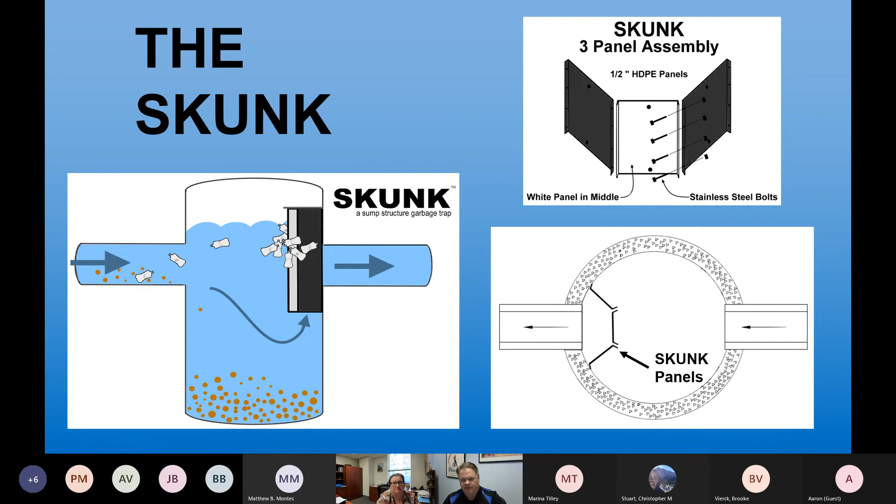So we went into a 2-year research and development and created the product called the Skunk. Very similar, goes over the outlet pipe. It's totally enclosed, so it stops all the garbage and the oil. As you can see on the left, it sticks a foot below the outlet pipe, so it requires a 3-foot sump as well, and the clean water is able to go underneath and through, while it stops all the garbage and oil. Comes in panels.

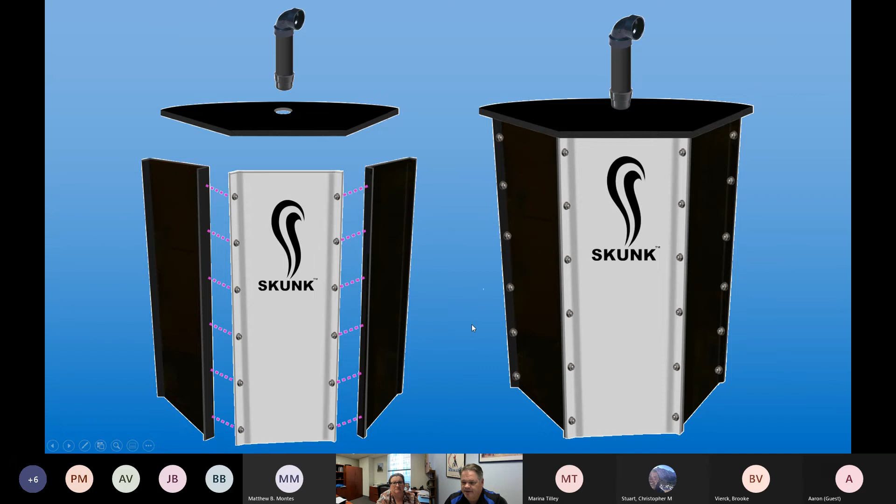This is what it looks like. Has a vent out the top so that it doesn't cause any vacuum or suction issues. And it's very easy to install, can be new construction or retrofit as well. Made in the USA, and that is the Skunk.